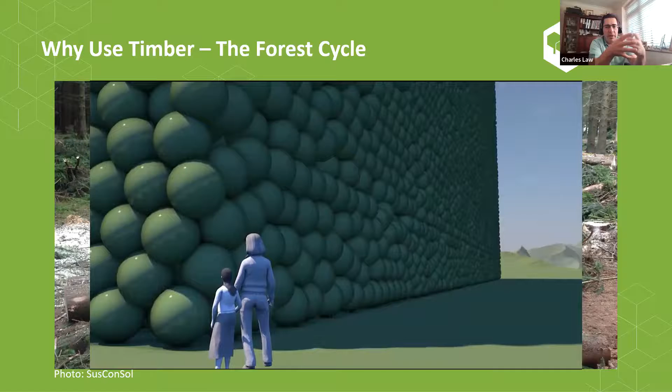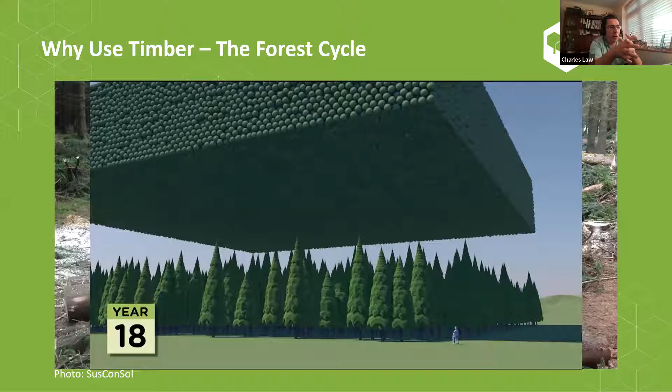This is a typical Sitka spruce plantation in the UK, and a hectare of that plantation will absorb around 483 tonnes of CO2 over its life cycle. In year 1, not so much is happening. As it goes on, the carbon will start to be taken up, and as it starts to grow, that carbon's being sucked up. You'll then have thinnings, probably around 15 to 20 years, where they start to take timber out for different products, usually panel products, OSBs, that sort of stuff.

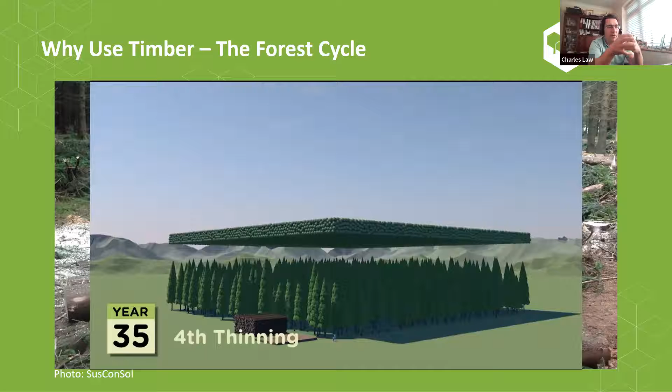Later on, maybe 25, 30 years, you'll start to see some sawn timber coming out, maybe some fencing panels and posts coming out of that. And then, it's actually getting shorter now - talking to the Forestry Commission, they might clear fell up to 35 years, but generally around 40 years they'll clear fell that stand.

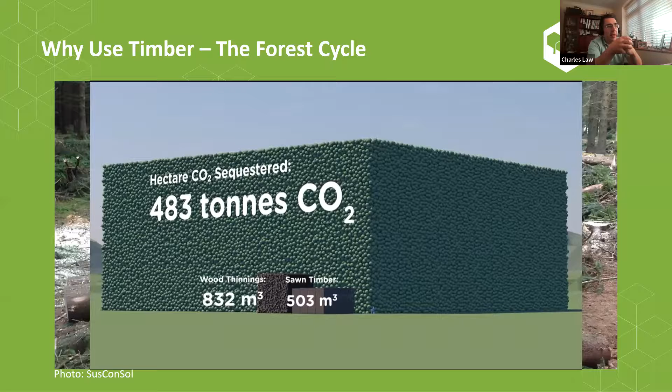And that's generally your sawn timber that you'll see in the structural timber applications used in construction. But once they've felled those trees, they'll generally be replanted in that same area of land. So you can see that timber is an absolutely sustainable product - replanting, regrowing that timber over its life cycle, over that 40-year cycle.

So as it says, using timber is good for the environment - it is in our eyes. But just to give you some more facts and figures behind that, we need to understand the carbon balance.

People sometimes say to me, well, you chop a tree down, that carbon's been lost - it's not going to be sucking carbon up anymore. And then you lose a certain amount in that first few years while it's starting to regrow - it's not sucking up as much carbon as it could be. And yes, absolutely, that's true on that hectare basis.

But what you've got to do is actually look at this at a European level or UK level. That then starts to even out all those little sawtooth graphs you might see where the carbon drops off. Actually, the carbon sink in Europe is growing. There's currently around 227 million hectares of forest in Europe - that includes the UK, by the way. When I'm talking about Europe, I'm not talking EU, I'm talking Europe, and that includes the UK.

Forest covers around 35% of the land area on average, and that's growing by about 0.2% per annum at the moment. It's estimated that the carbon stock in the tree biomass, soil and everything else is around 135 billion tonnes of CO2 stored in there. The annual uptake is around 570 million tonnes, taking into account removals through harvesting and everything else. So that's taken up a lot of carbon over time.

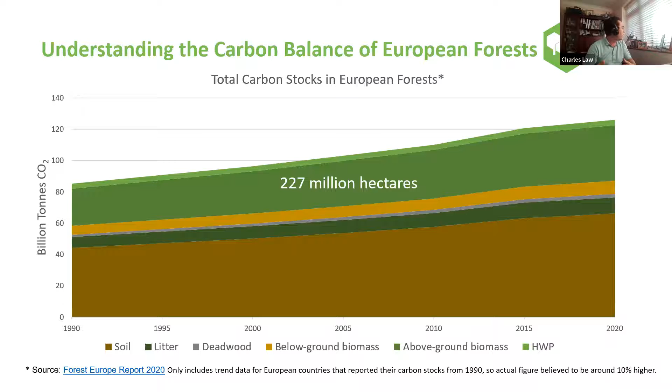So quite significant amounts of carbon are being sucked out of the atmosphere by our trees, and that's one of the reasons we do need to make sure we plant a lot more trees in the UK. We need to get tree cover up from 13%—I'm not saying we're going to get it up to European levels of 35%, but we do need to get it maybe near 20%. That's going to allow us to store a lot more carbon.

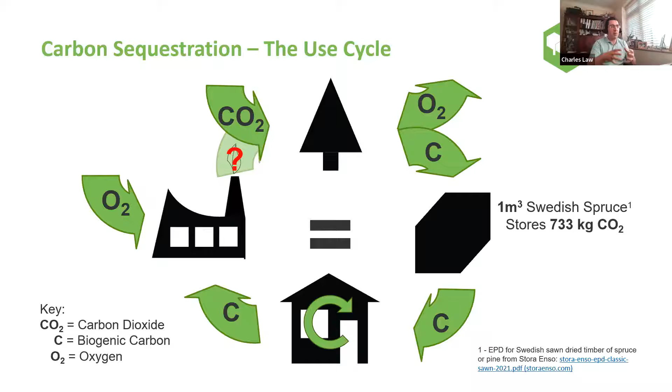So that carbon doesn't actually get emitted into the atmosphere going forward. But that's a question for the future. At the moment, we have to account for it as being emitted at the end of life. That's the one problem we've got. So that's the sequestration cycle.

Now, the other question we get asked a lot is, when should we take account of that carbon in the structure? This has been a discussion on the Timber Development UK Carbon Group - do we look at it as backwards accounting or forwards accounting? There's a few people saying we should be making a forwards accounting.

Just to give you a few issues with that, this is how the backwards approach works - this is the way most people look at it. You've got that tree starting off in year zero, minus 50. That's when the tree started to grow, and we harvest it at 50 years. That harvesting and production process requires a small amount of carbon, energy and everything else. That means that net figure, say 733 for example that we use for Stora Enso timber, drops to more like just under 650.

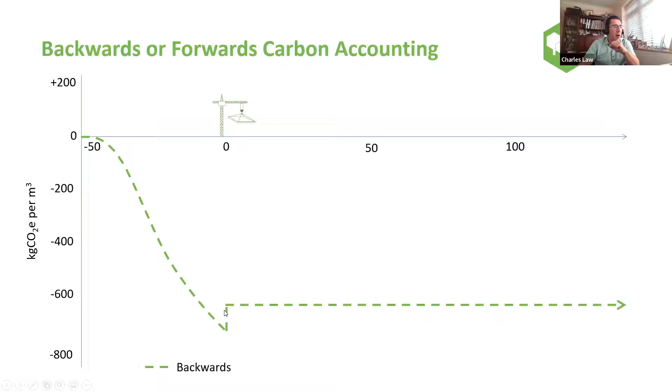Now that carbon is then stored in the timber for the length of that building. It doesn't emit or release that carbon unless you burn it or take it down and dispose of it in landfill.

So that's the approach that most people think we should be taking. There is obviously a crowd out there that says actually we shouldn't take account of that carbon that way - we should take account of the carbon over some of the life of the building. Now, the problem with that is that you've got a gap. There's a missing piece of carbon that isn't in the atmosphere anywhere. It's missing because it has been sucked out by that tree and that timber that you're using. It doesn't suddenly reappear later on.

So we've got this missing carbon that's not in the accounting period. And just to reiterate, you must make sure, if you're going to take account of this carbon, that your timber is from a sustainable source - certified in most cases is the requirement, and in the UK that is generally the case. If you're working elsewhere, that might be something you need to check. But in the UK, generally all the timber that comes in here, for EUTR previously and now UKTR, must meet those requirements anyway.

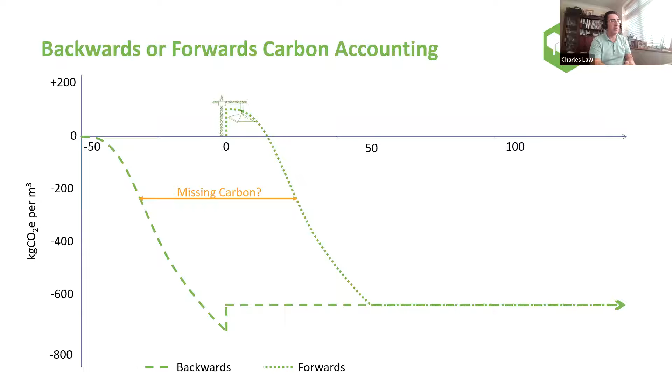So we've got that missing carbon. That's why, as far as we're concerned, we haven't taken account of it that way - we're taking that backwards approach. And that's the way the standards actually use it. They take account of that carbon at year zero - it comes down and they account for that figure here.

So we've got this solid bold line, which is the EN standard - it says you take account of the carbon. If you are doing a whole life assessment, you can take account of the sequestration. If you're not, you can't - you just have a line up here. But the one thing with the EN standards is you have to take a nominal period, which they say at the moment most people are taking as 60 years, where that carbon is then released back into the atmosphere.

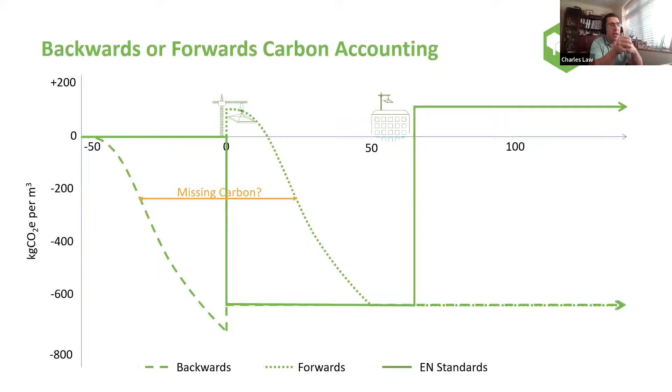And there is a bit of an issue with us in the timber industry - we're not necessarily sure that a building will be demolished after 60 years, and even if it is, it's obviously going to get reused. So there are a few questions there, but they basically say you have to hand that carbon back at the end of life, and we'll go through that in more detail as we go through the course here. But you still end up with a very low carbon output here.

So just on the standards, we mentioned them a couple of times - what are the two main standards? There's two main ones that we work to in construction. There's BS EN 15804, which is the one for sustainability of construction products, construction works, environmental product declaration - so that's the core rules, what they call the category rules for construction products.

So that's the actual product itself, whether that's a piece of timber, a CLT panel, an I-beam, whatever it might be. That's for that EPD.

You then have BS EN 15978, the Sustainability of Construction Works Assessment of Environmental Performance of Buildings. So this is the actual building level assessment. So there's the two levels: the product assessment is 15804 and the building level is 15978.

Now, to accompany that, the RICS have also come out with what they call their professional statement on whole life carbon assessment for the built environment. That was released in 2017. It's currently being updated by Simon Sturgis and his team, including Jane Anderson, who wrote our paper that we mentioned. That team is working on an update at the moment, which tries to clarify some of the rules within 15978.

Now, one of the key bits within the assessment of 978 is that they do require you to do a cradle to grave assessment, so an end of life assessment. You've got to make sure you include that end of life process, preferably module D as well, which is the benefits of reuse in the next system. That doesn't form part of the calculation, but just gets put in as a number, this module D benefit.

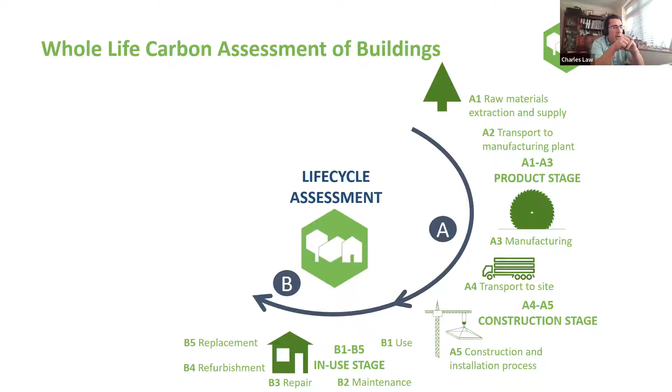You've then got stage B, which is the in-use stage, so B1 to 5. So B1 to 5 is the embodied carbon bit. So things like energy in use, which timber doesn't have, so that's generally zero. But if you've got maintenance, repair, refurbishment, replacement, if you're having to replace certain elements of the building over its life cycle, that's where these would be included.

So that would be, like I say, the A1 to 5 emissions would be, and the transport would be included in that, in effect, that refurbishment stage, that would be included in B. You'd have to allow that if you had to replace certain elements over that life cycle of the building. So, for example, if the windows are only designed to last 30 years, you'd have to include a replacement cycle in there if you allow for a 60-year life cycle. Okay, so that's where we need to make sure that we look at longevity, circular economy initiatives, etc., to try and make sure that we keep those emissions as low as possible.

The next, so that's just to explain that A1 to 5 and B1 to 5 are all embodied emissions, but the A1 to 5 emissions are also sometimes termed upfront carbon. So if you ever hear that term upfront, that's referring to that A1 to 5. In effect, all the emissions up to the handover of the building is in effect where you're getting to there.

We then have some operational carbon, which we don't need to worry about with timber, because it's not an energy, it's not making energy, it's not lighting up, it's not doing anything. So there aren't any B6 and B7 emissions with timber anyway.

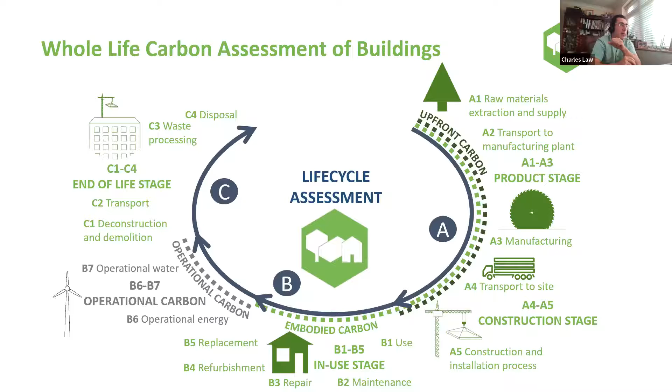Waste processing can include some of your energy recovery and transferring it into say panel boards or something like that. So that would be your waste processing bit. So anything that needs to be done to get that material to a point where it can be used for something else, whether it's biomass, whether it's panel boards, whatever it might be.

And then we have this, let's say that's embodied carbon emissions as well. And then we have this D section, which is beyond the building life cycle, which I'll go into a bit more detail later on, but it's basically the benefits of reusing that product for something else.

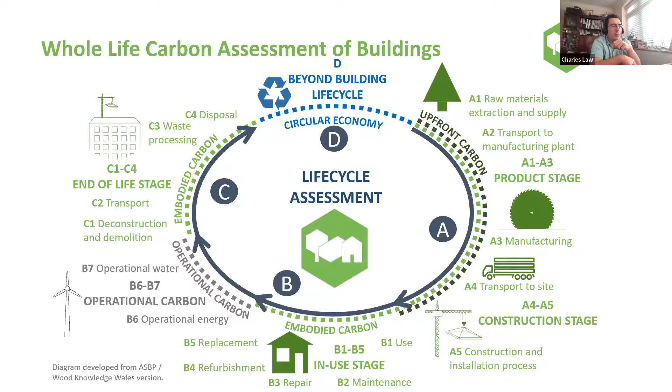So just to give you some examples here of some of the stuff that might be done. So A1 to 3, your raw material extraction might be 11 to 12 kilograms of carbon. So that's your harvester taking the tree out and cutting it down. That is process, and anything obviously management of the forest as well. So managing the forest through that 40 years would be included in that A1 emission.

But you've then got that sequestered carbon which comes out. So you've got that minus figure of that 733 that comes out of that. You've then got the transport from the forest into the factory, which can be quite small. Here it's quite a significant one, this particular example, but that could be quite small because there's a lot of factories, especially for CLT and things like that, very close to the forest.

And then you've got your manufacturing emissions. So this is things like kiln drying, the electricity used for the saws and stuff like that. And again, the key thing there is to try and see if we can use some of that waste material from the processing of the timber. We're going to get sawdust, we're going to get offcuts, using those for maybe biomass and CHP plants, so you can actually generate your own energy and heat to dry in those kilns.

And a good example of that is the picture that we've got there. That is a factory, that's Wiehag's factory in Austria. And that generates 38 gigawatt hours of renewable energy per annum from its biomass conversion, around 10,000 tons of the sawdust and offcuts.

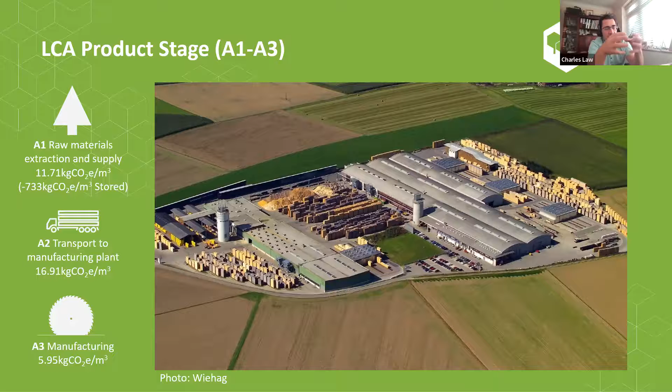So that keeps that embodied A3 emission in particular very low, which is really good. And it will get lower over time as well. There's a lot more companies starting to look at that process.

We've then got our on-site emissions, and the good thing is these are relatively low. You're looking at a total of probably around 50 kilograms of CO2 per cubic meter on site. One key reason for that is that although the transport might be over a long distance, the weight you're transporting is quite low, so that does offset some of it.

Also, when you get to site, something like CLT timber frame panels that you're lifting into place are quite light as well. So you don't need a very large crane drawing lots of energy from the grid, or an additional generator because there's not enough power coming out the road.

You can use a slightly smaller plant, which has real spin-off benefits for your carbon emissions, because then you can use that grid supply, and that grid supply is ever growing. As soon as you've got to put a generator in to run that crane, your emissions are going to start going up on site.

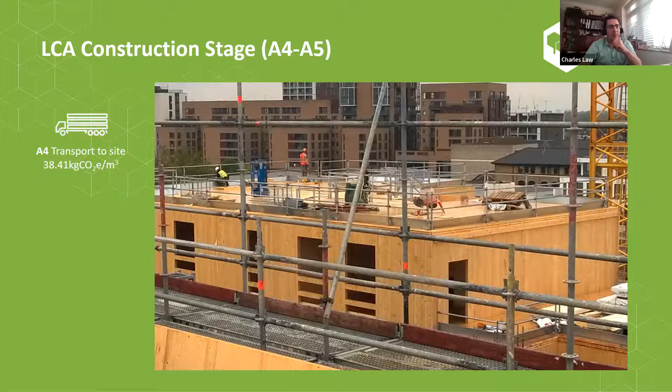So that can be quite small. The transport is a significant bit, and can be up to 70% of the emissions of A4 and 5, but the on-site emissions again are generally low.

We've then got that in-use stage, which includes maintenance, repair, refurbishment and replacement of products. This is where we really need to look at how we can make those products more durable, through good design, making sure we haven't got issues where water is sitting in external components, and through choice of materials, making sure we use durable timber species.

So if we've got cladding on the outside of the building, maybe let's spend a bit extra. Let's not use a softwood cladding that may need to be replaced after 25 years. Let's maybe go with a durable hardwood species, like cedar, oak, or sweet chestnut, or even some of these new modified timbers that you can see now.

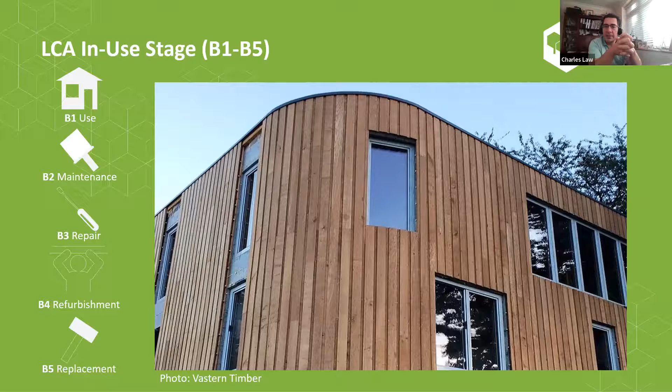And this is an example here. This is a product called Brimstone, which is a modified hardwood. It's heat treated, made from ash, so things like ash dieback find a use in this product because it heat treats it. It can also be used on sycamore and poplar. It heat treats it and changes the properties within that timber so that it lasts for much longer.

Things like that, if we can make that timber last longer - windows or Accoya is another example for windows and stuff like that - you can then make that timber last the life cycle of the building, and you won't have any maintenance costs.

You then have to include that end of life, and this is the key bit that does cause a bit of an issue for the timber industry, because we end up having to put that CO2 back into the mix. That sequestered CO2 that we took out at the beginning, we have to add it back in here.

Now, just to give you some numbers around what happens to timber at end of life at the moment, around 69% of that waste timber goes into biomass energy production. Some biomass is better than others, but overall it's about 69%.

You've got about 20% going into recycled panel boards, and around 10% going into animal bedding and other surface dressings, things like paving paths, that sort of thing. And less than 1% actually goes to landfill.

Some people are surprised at that - I think it's a lot higher. It's not; very little timber is going into landfill nowadays. So based on that, some of these figures are quite low, since generally your wood processing is fairly close to where the wood is deemed waste.

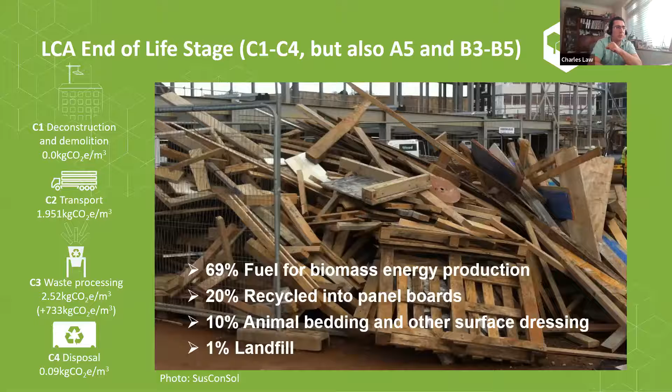So you've got a certain amount of processing that might be at the transfer station, or maybe even a dedicated wood recycling centre, and that's where C3 is where you start to add back in that carbon emission, either C3 or C4, depending on which disposed of. I've put it in C3 here because the majority of it is going into biomass fuel production, so it's that processing for that. These figures are based on that mix, so very low emissions at end of life anyway. The big issue is you have to add that sequestration back in at the end of life. So that's the key issue there.

One of the key things we've put in the paper, which wasn't anywhere to be found - we couldn't find any information on end of life destinations for certain types of timber. We had the overall figure, which the Wood Recyclers' Association kindly put out every year showing the breakdown of stuff going to biomass energy and everything else, but it didn't break it down into the different types of products. So myself and Jane worked through this, from my experience on the waste side and Jane's experience on the carbon side and energy recovery, incineration. We've come up with these numbers here, aligned with those 69, 20, 10, 1 figures from the previous slide, trying to apportion where the timber is likely to go from each different area.

So, like solid wood timber, if it's hardwood, no preservatives, no coatings, that's much more likely to go into your animal bedding than anywhere else. Whereas something like treated timber is more likely to go into biomass energy recovery. As long as it's non-hazardous, it can go into panel boards. If you've got timber coming out of an older building, which in a lot of cases is now deemed hazardous - floor joists, roof joists, tile battens and things like that - those would be classed as hazardous unless you can prove otherwise. The only destination for that now is biomass, either incineration with energy recovery or incineration with low energy recovery. That's why we split those two bits out.

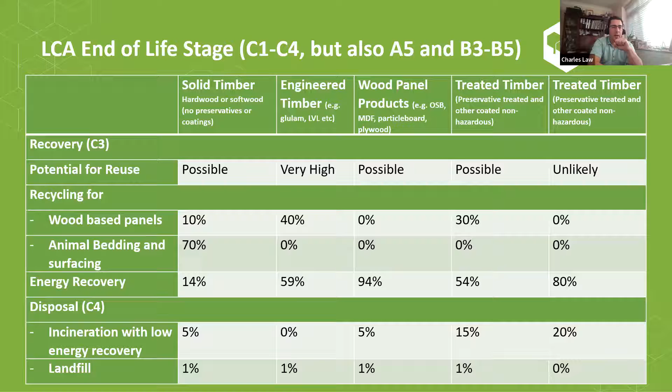So that's our end of life. We then talk about our beyond life cycle, and timber's got a really good story as far as the circular economy here. We're regrowing that resource, but we use it in maybe mass timber. That mass timber may be reclaimed and reused in a smaller building first off, so we can cut down those panels and use them again.

So that's reuse. It then might be recycled into a panel board on a second life - a third life of that product might be a panel board that goes into your furniture or chipboard flooring, stored in that build for another long amount of time. It might then go into insulation even, and then biomass. So you might get 4 or 5 uses out of a piece of timber through different stages, what we call a cascading recycling approach. It's only at the end of that life, which could be 200 or 300 years possibly, before it goes into biomass. So a very good product. That CO2 then goes back into feeding those trees to grow again for a new crop of timber - a very good cycle.

But that D cycle gets quite complicated, because what it's talking about is what are the benefits of that to other services. For example, if you're using waste timber for biomass energy, you're not then using maybe natural gas from the grid. So there's a benefit there in carbon because you're not using gas, you're using biomass - that's allowed for within that module D discussion. And again, by reusing timber and recycling it and using it in panel boards, you're not using virgin timber. So there's a benefit there from not having the transport emissions maybe associated with virgin timber, because your source timber is much closer. So there's another benefit there.

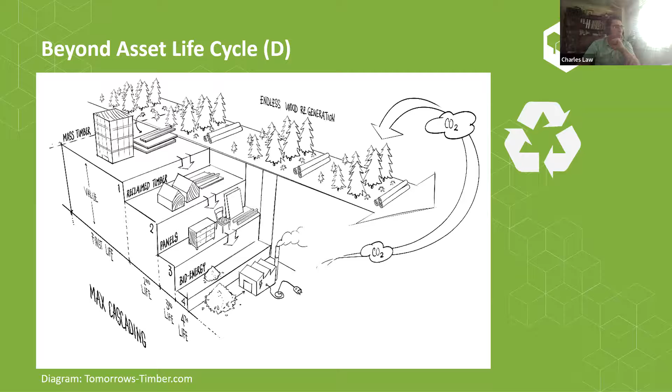So once we've got our products, and we start looking at buildings then, each one of those, we obviously got as a product, but then we incorporate that into the building level approach as well. So we take our EPD, what can we do to try and minimize the embodied carbon within that structure?

The first thing, the most important one, is do we actually need a new building in the first place? Could we actually repurpose the existing building on the site? Timber can be really good for this, because if you've got an existing concrete or steel structure and you want to put some more floor area in it, you might want to add an extra floor or fill in an atrium or something along those lines. You could use timber for that.

So you're not actually demolishing the building, you're just extending it, either on the roof or out the side or out the back, whatever it may be. So the first thing to do is, can you repurpose that existing structure? As soon as we knock down that building, even if we put a timber structure back up, there's going to be a carbon cost associated with that. So we've got to try and make sure we reuse whatever's there in the first place.

Once you've done that, assess the embodied carbon early to maximize the opportunity for reduction. Make sure that we're looking at the full carbon picture, even if we're just using the industry figures for certain products. Make sure we look at those first, to make sure we can make the best choices for that building on a carbon basis.

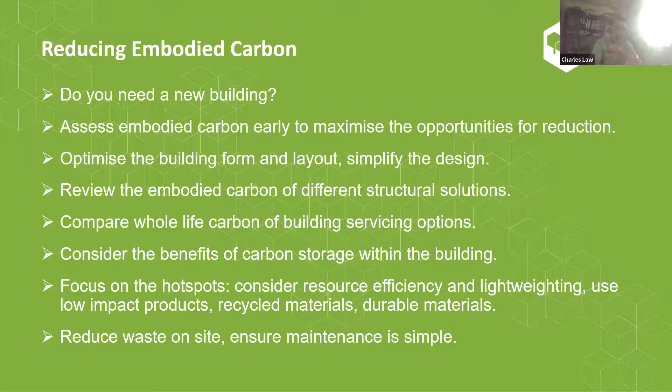Once we've done all of that, we've got that carbon figure down as low as possible. We're not going to get to zero carbon, not straight away, not in the next 5-10 years in my mind, maybe not until even 2050. We're going to struggle to get to zero carbon. There's going to be an element of carbon in there for a long while yet.

But once we've got that down as low as possible, then we can start considering offsetting to make that building net zero, what we call net zero. So the bit of carbon that's left, we can offset. And when you're talking about net zero, that needs to be through what we call a carbon removal program.

So that would be things like afforestation. Planting new forests would be net zero, rather than say mitigation, which would be off-site renewables or community projects, clean cook stoves somewhere. That's a mitigation thing, and that's not allowed under net zero according to the latest standards from the Science-Based Targets Initiative. It must be afforestation.

When you look at the price of that, that may not be cheap. The Greater London Authority are actually putting a price of around £95 per tonne on any residual carbon that you need to offset. So it's quite a significant amount.

So that's really us. We're ready for questions now, David. But just to leave you, Andrew, with a few calls to action.